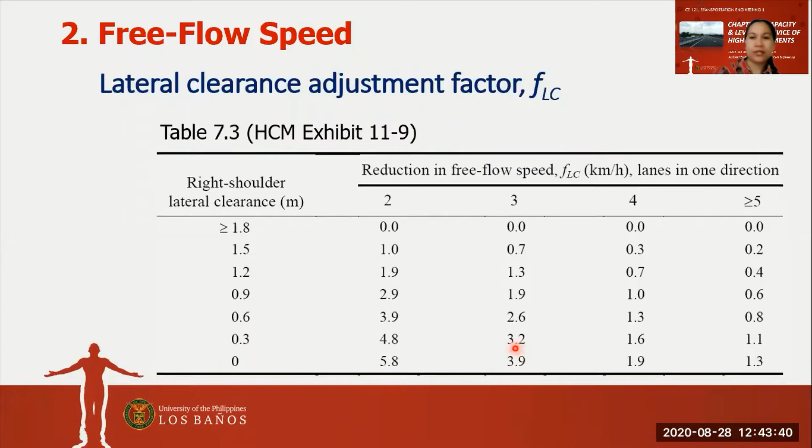Okay, and we are still in process number 2, determining the free flow speed. Now, what is the total ramp density? This is the number of on and off ramps 5 km upstream and 5 km downstream. For example, you have a 10-kilometer highway, then you have to count how many ramps are there, and then you divide it by 10 kilometers.

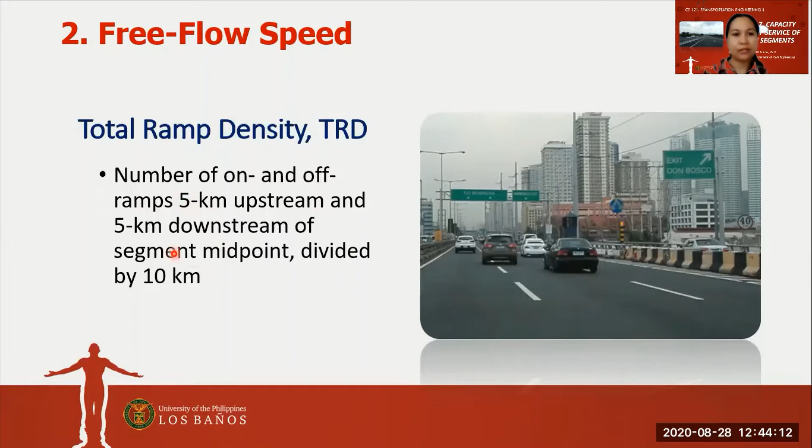Now let's move on to process number 3. We're ready to calculate the analysis flow rate of the freeway. Under this, we have to adjust the peak hour factor, the vehicle mix, and the driver population.

VP here is actually the flow rate. We determine the flow rate by dividing the hourly volume of the freeway by the product of your peak hour factor, the number of lanes in one direction, the heavy vehicle adjustment factor, and the driver population.

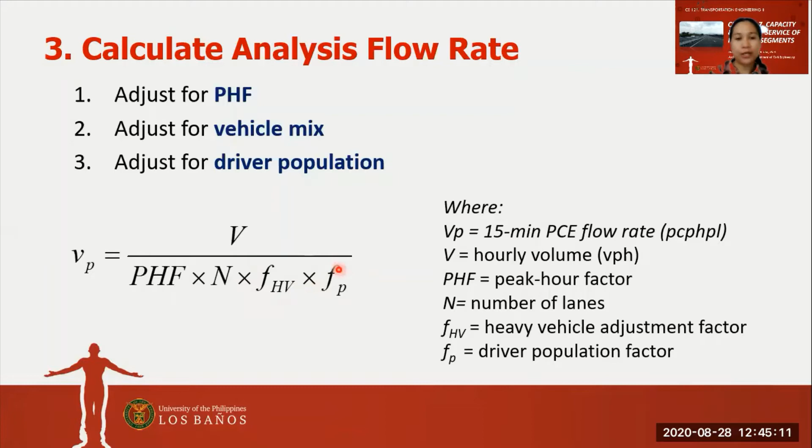Now, how can we determine the values of this one? The peak hour factor can be determined by dividing the hourly volume by the 15-minute volume within the hour of analysis. This is the maximum volume within the hour, multiplied by 4. So that's the peak hour factor.

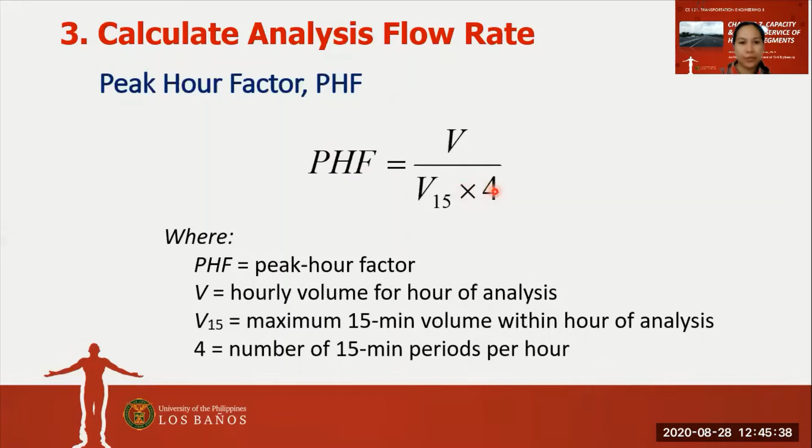We also need to take into account the traffic mix. For example, you have passenger cars on the freeway, you have trucks and buses as well, and recreational vehicles. So you have to convert them into passenger car equivalency.

We also need to take into account the conditions of the grade. PCE can be selected for one of 3 conditions: specific upgrades, specific downgrades, and extended general freeway segments.

In this chapter, we are covering only the level freeways. So we may not cover the freeways with upgrades and downgrades, but we will mention the tables that are used in determining the adjustment factors when you have specifics like this.

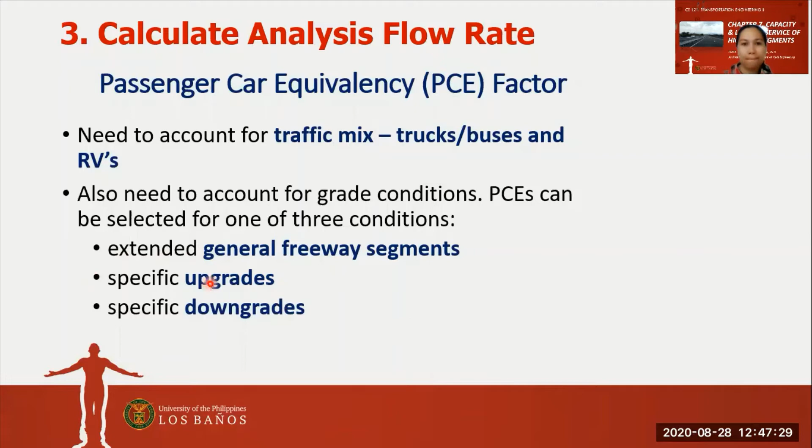For the extended general freeway segments, as a guideline, we usually use the terrain of the freeway classified as level, rolling terrain, or mountainous terrain.

For the adjustment factor for heavy vehicles, for example, we have a level terrain, then we need the ET for trucks and buses, and we can use the value of 1.5. If you have RVs, then you can use 1.2, and so on. So we can use table 7.4 in determining these values, which we use in determining the heavy vehicle adjustment factor.

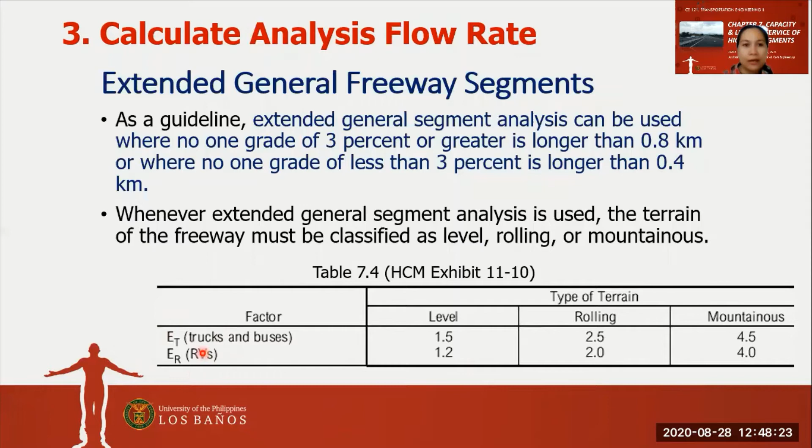A level terrain is any combination of grades and horizontal or vertical alignment that permits heavy vehicles to maintain the speed of a passenger car, and this classification generally includes short grades of no more than 2%.

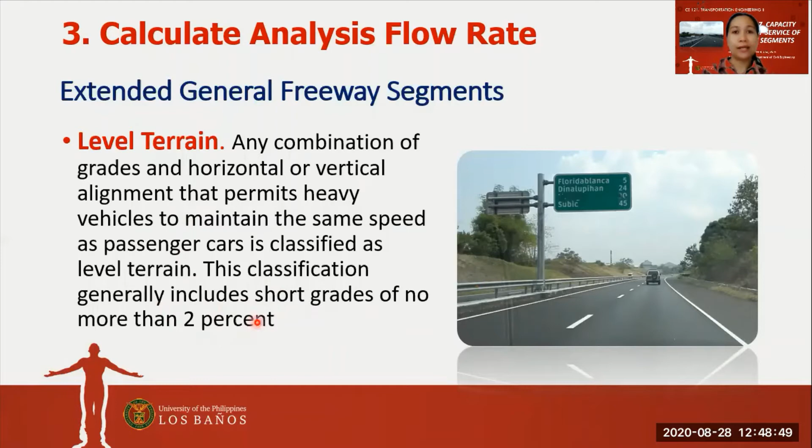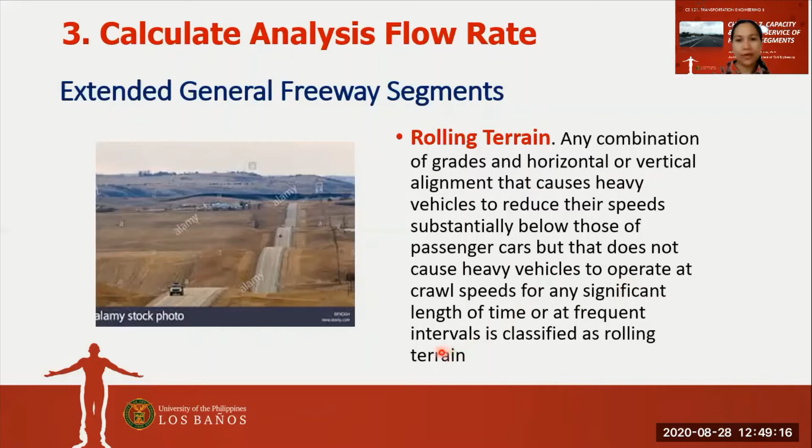How about for a rolling terrain? This is any combination of grades or vertical alignment that causes heavy vehicles to reduce their speeds below those of passenger cars, but this does not cause heavy vehicles to operate at crawl speeds for any significant distance. So this is classified as rolling terrain.

And then we have the mountainous terrain. This is any combination of grades, whether horizontal or vertical alignment, that causes heavy vehicles to operate at crawl speeds for significant distances or at frequent intervals, and this is classified as mountainous terrain.

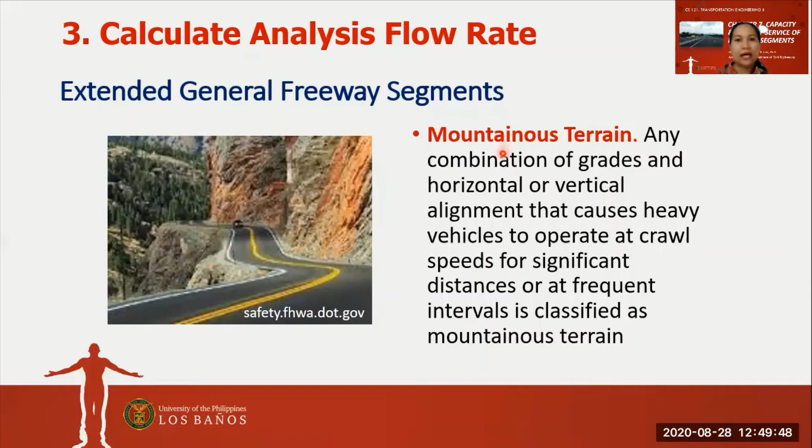This table here shows you the PCEs for trucks and buses for specific upgrades. You can use this when the analysis segment consists of terrain that cannot be considered an extended general segment. So you have the upgrade percent, the length of the segment in kilometers, and then depending on how many trucks you have in the traffic stream.

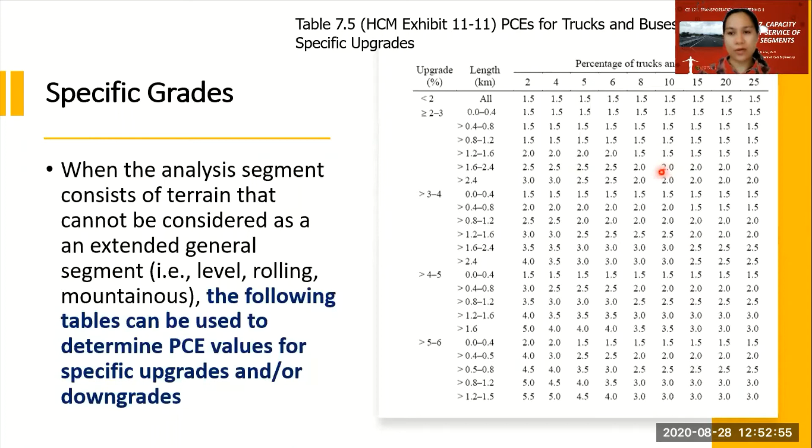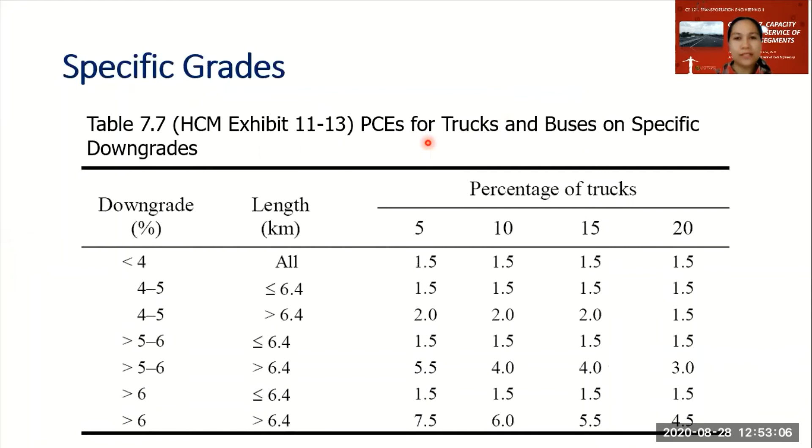For example, with 10% trucks, and you have a greater or equal to 2 to 3% upgrade with a length of 1.5 kilometers, then you can use 1.5 when you have 10% of trucks and buses within your traffic stream. This table is also used for PCEs for RVs on specific upgrades, and for PCEs for trucks and buses on specific downgrades.

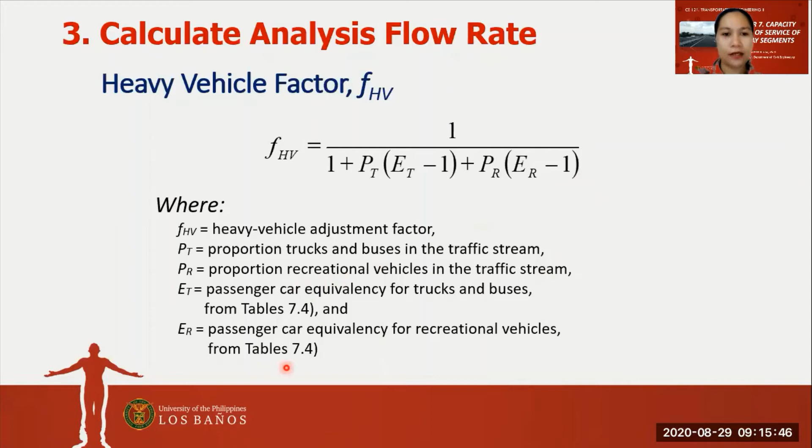The heavy vehicle factor, FHV, is calculated using this formula: 1 over 1 plus PT, which is the proportion of trucks and buses in the traffic stream, multiplied by ET, the passenger car equivalency for trucks and buses, which can be found in table 7.4, minus 1, plus PR, the proportion of recreational vehicles in the traffic stream, multiplied by the passenger car equivalency for recreational vehicles, minus 1.

The driver population factor, FP, ranges from 1.0 to 0.85. In general, if the problem states that the commuter traffic is mostly familiar users, then 1.0 can be used, unless there is sufficient evidence or it is the analyst's judgment that a lesser value reflecting more recreational traffic characteristics should be applied.

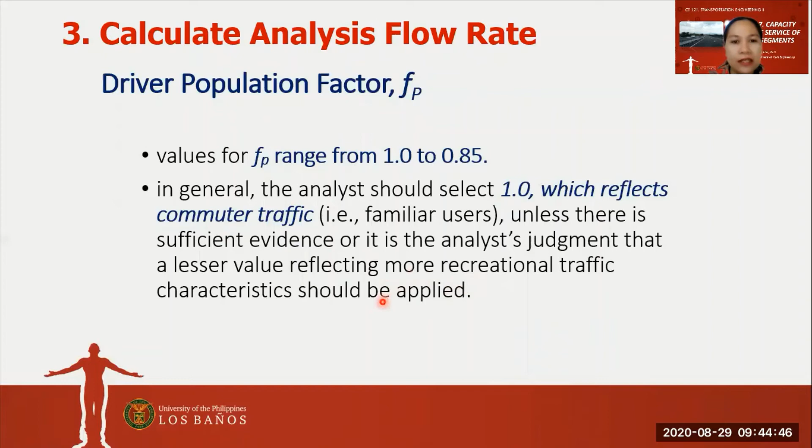The next step is to calculate the density. Density is equal to flow rate over the average passenger car speed in kilometers per hour. How do we determine the average passenger car speed? We'll discuss it later when we go to the example problem. This flow rate has been calculated in the past using the indicated equation.

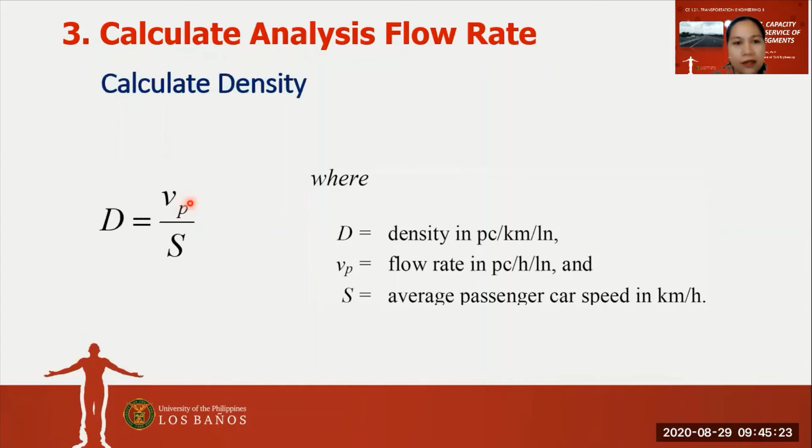After calculating the density, you can now determine the level of service of the freeway. You can use this chart, or you can use the table shown in the next slides. This chart shows the S in kilometers per hour, and the flow rate calculated in step number 3. You can use this chart to determine the level of service if you already calculated the flow rate and identified the speed in kilometers per hour.

You can also use this table when you have calculated the density, as shown in the previous slide. For example, your density is equal to 11.2. You can see this broken line showing the density at 11.2 passenger cars per kilometer per lane, which means the level of service of the freeway is within the region of LOS B.

How about if you have calculated a density of, let's say, 10 passenger cars per kilometer per lane? If you look at this broken line, this is 6.8 and this is 11.2, so 10 falls anywhere within this region, meaning the LOS is still B. If the density calculated is 6.8 passenger cars per kilometer per lane or less, then the LOS is in region A. The same applies to the regions of LOS C, LOS D, LOS E, and LOS F.

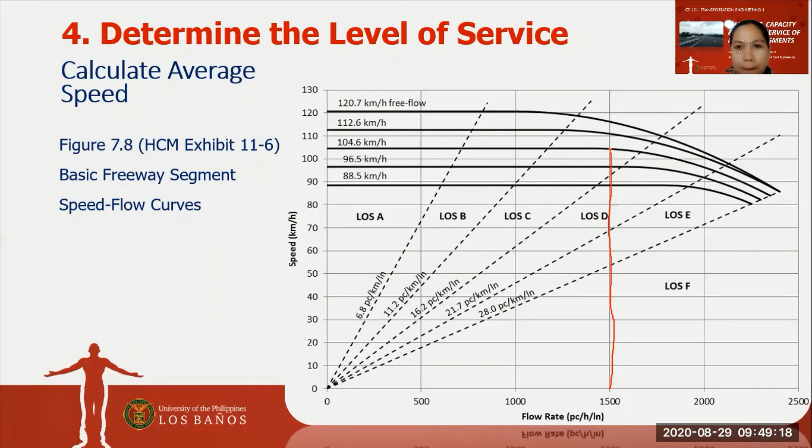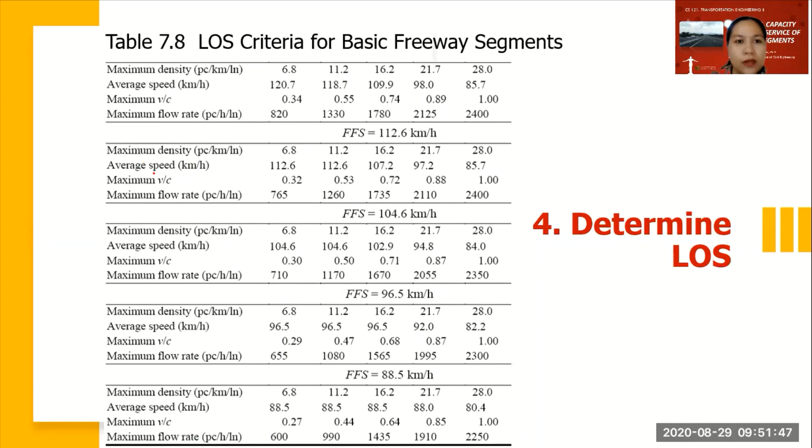You can also use table 7.1 in determining the level of service of a freeway. If you have already calculated the density, you can just look at this table, and wherever the calculated density falls, that's the corresponding level of service of the freeway. For example, if you have calculated a density equal to 10 passenger cars per kilometer per lane, then it's under this range, which means the freeway has a level of service B.

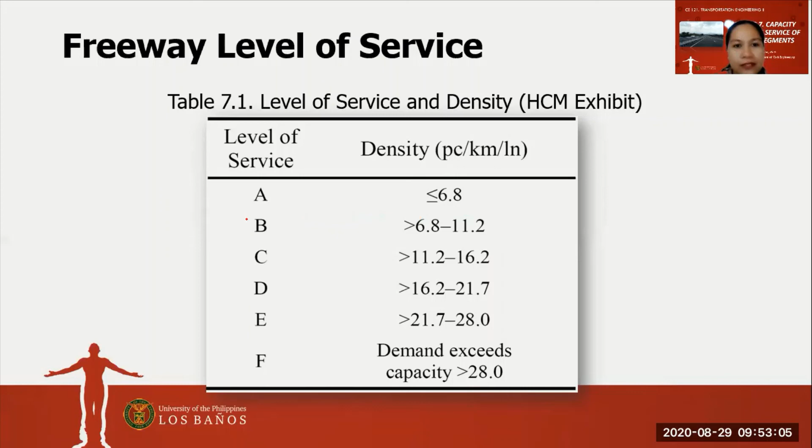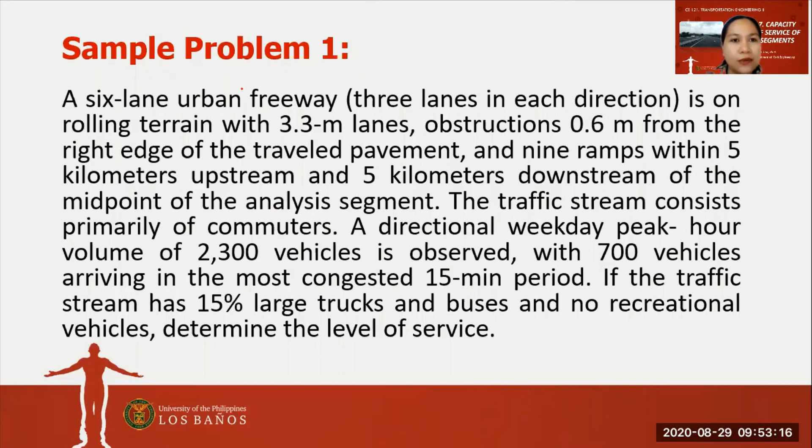Now, let's look at one example of how to apply the formulas that we have discussed in determining the level of service of a highway.